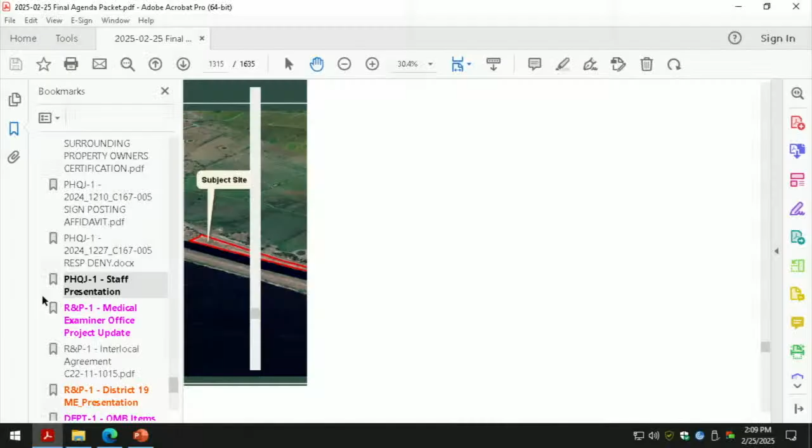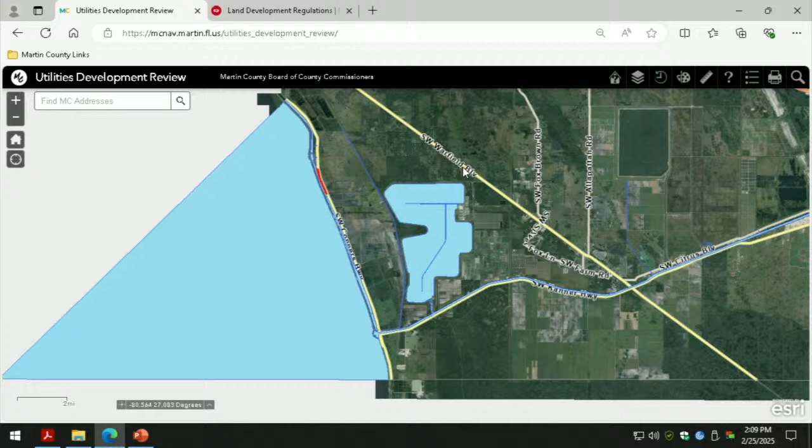for the purposes of clarity, just bring up this map. Since the property is over a mile long, it gives you a little bit better view of where it's at. So the approximate 18.2 acre site is generally located on the west side of Southwest Conners Highway, approximately 6 miles north of Southwest Kanner Highway and south of 10150 Southwest Conners Highway, which is the property to the north. This undeveloped land borders a canal on its west side and Southwest Conners Highway on its east side. There's a single-family home to the north of the property, and due south is cropland. The property is outside the Urban Services District and will use well and septic.

That's it. Oops, that's it. That's a short, sorry.

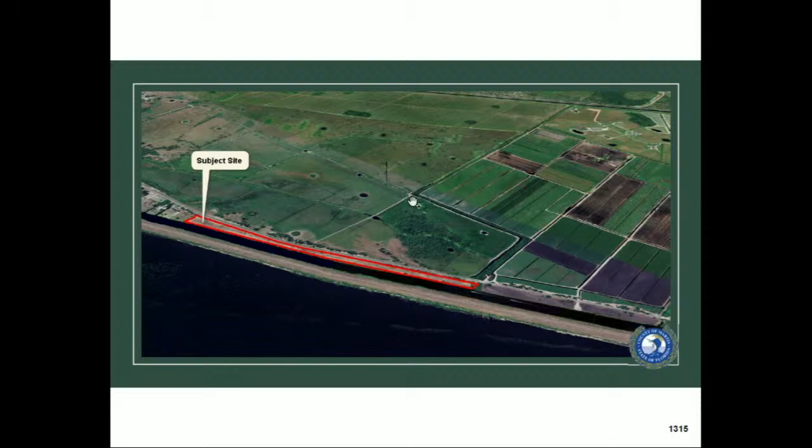The existing zoning district on the property is RE2A, Rural Estate Density District, with a rural density underlying future land use. Single-family detached dwellings are a permitted use in the RE2A zoning district. Pursuant to Policy 4.13A.5, parentheses 1, of the Martin County Comprehensive Growth Management Plan, lands with rural density shall be developed at a density of no more than 1 dwelling per 2 gross acres. All rural development shall have a maximum building height of 40 feet and maintain at least 50% of the gross land area as open space. This proposal complies with these requirements.

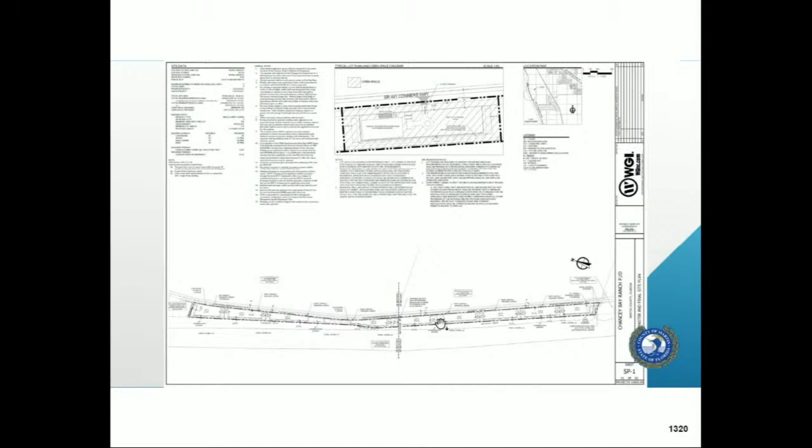This is sheet 1 of the final site plan. As I said, it's over a mile long, about 18.2 acres, so that has been split up or divided into 2-acre lots minimum, and you can see that the east and west property lines vary, so the lengths of the properties also vary.

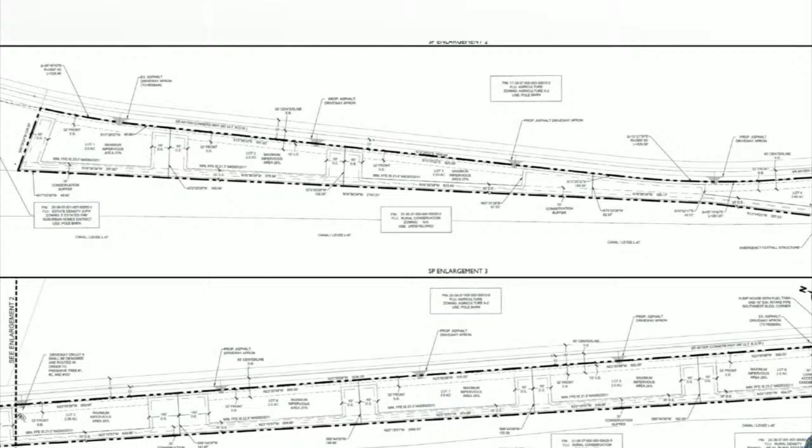In the event that the stormwater runoff becomes too high, excess water will be discharged into the canal, which is the legal positive outfall for this project, through an emergency outfall structure.

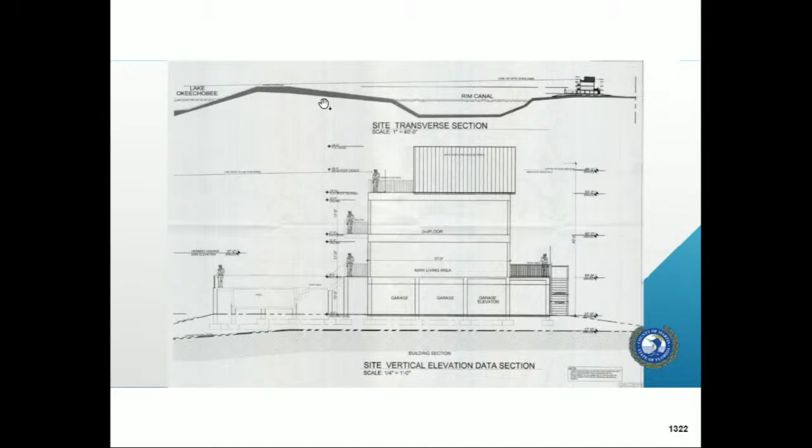Development review staff have found the CBR Investors LLC application to comply with all applicable regulations and the comprehensive growth management plan as detailed in the staff report. This application was heard before the local planning agency on February 20th, 2025, and it was voted 3-2 in favor of accepting staff's recommendation of approval.

Staff does recommend approval of this application, and we move that the board receive and file the agenda item and its attachments, including the staff report, as Exhibit 1. And we move that the board adopt the resolution approving the rezoning from RE2A Rural Estate District to Planned Unit Development, and approve the Chancey Bay Ranch PUD zoning agreement, including the master final site plan. That concludes the presentation.

Happy to answer any questions for staff. I didn't get the LPA recommendation. It was 3-2 in favor of staff's recommendation. And the dissenters, what were their reasons, do you recall?

Yes, one did not want there to be the upper level, which was shown on the conceptual plan, to be living space. They wanted it to be just a place you could sit outside, but not enclosed, such as a bedroom, no living space. I don't recall.

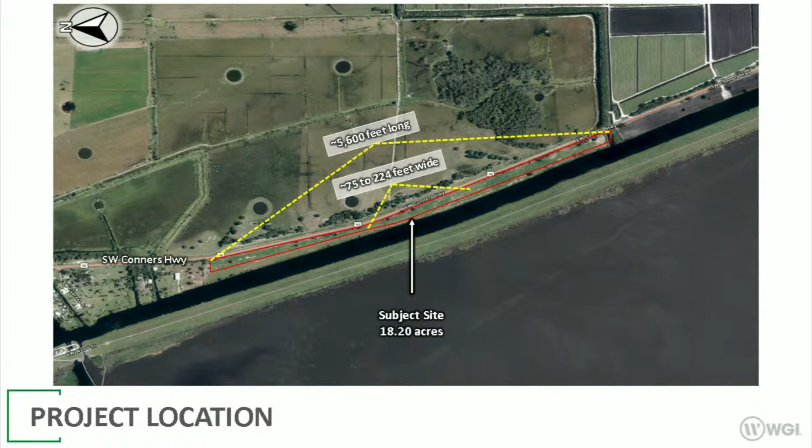Surrounding uses, also as Brian explained, are primarily agricultural, with some single-family residential to the north. This is what you would see currently if you drive along Conners Highway and look off to the west.

It's small and narrow, and it's separated by the highway from the other property that the same property owner owns. So it's too small and narrow to be effectively used as agriculture. It is already zoned with the RE2A zoning, so we're seeking to develop a compatible density subdivision.

So what are we applying for? It's a master and final site plan for 9 single-family homes, all on 2-acre lots, as well as a PUD agreement that rezones the property from RE2A to PUD, and it formalizes the development agreement and the required public benefits.

As staff noted in their presentation, there are things that we are not doing. We're not requesting a land use change. That's very important. The existing land use designation is rural density, which allows 1 unit per 2 acres, and that's what we're seeking. We're not seeking to increase the allowable density.

Number 2, we're not also increasing the density through any other means. So we're not increasing the land use, or not changing the future land use, I should say. We're also not decreasing the minimum lot size. So we're not taking 9 units and wanting to build them on half-acre lots at one end of the property. We're keeping them as intended to be 2-acre lots.

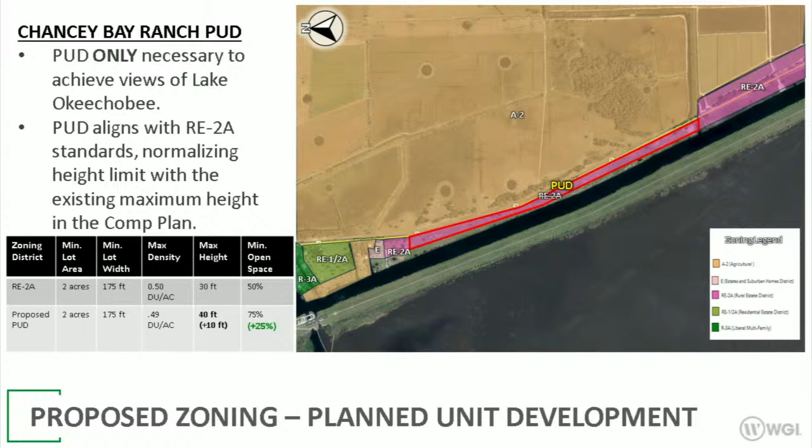So with any PUD, the applicant needs to proffer public benefits, which of course is ultimately the purview of the Board of County Commissioners. We are proffering to provide a signal preemption device for the Martin County Fire Rescue, which is a device that is put onto a signal so that all the trucks then have the equipment. When they approach the signal, it automatically turns that signal from red to green if it happens to be red, which allows for obviously faster response times across the county.

There's a second benefit to the public that is not a public benefit in the PUD agreement, but we think it is a benefit to the county and therefore the public, which is the design of the stormwater system. It's over-designed, so let me explain that. The standard county stormwater design and the South Florida Water Management District design is to hold back what's called the 25-year 3-day storm event, which is modeled. All the civil engineers know how to design stormwater to hold back that amount of water.

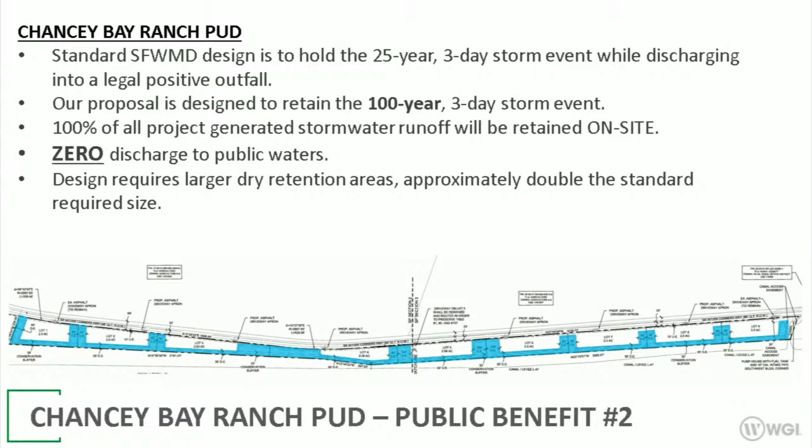So the proposed storm dry detention areas on this project is designed to retain the 100-year 3-day storm event, which is the largest storm you can model. So 100% of all the rainwater, stormwater that falls on the property will be retained on site and will not be discharged into the public water system. Our legal positive outfall is the rim canal, which is where we would normally be discharging our water. But again, we're designed to hold it back for the 100-year 3-day storm event with zero discharge into the public water system. That actually does require about twice the size of the stormwater design, or dry detention areas, I should say. So I just wanted to point that out as well.

So you saw the site plan in a black and white version on Brian's presentation. I'll get into a little more detail of it here. It's not anything fancy. The size of the property kind of lays itself out in terms of how the lots are designed. But again, it's 75% minimum open space. Each lot is 2 acres. We're not increasing density, and we're not decreasing the minimum lot size.

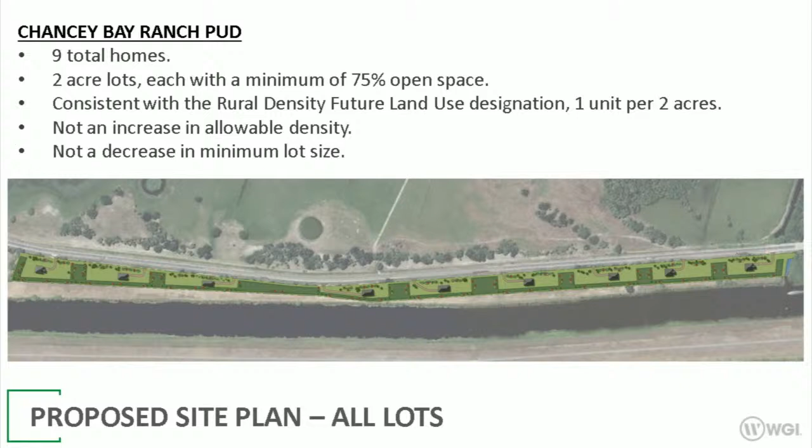Each house, when you scale it off, is approximately a 3,000 square foot footprint, just to give you an idea of what you're looking at as a representation. As Brian stated, we're not proposing specific houses, specific footprints or architecture with this.

That's handled at the building permit stage, not part of the PUD process. Each lot will have its own driveway connection to Conners Highway. The darker green areas represent the dry detention areas, where there's going to be landscaping, and additional landscaping that's not on our plan because it'll be up to each homeowner to plant trees between the front of their home and the highway.

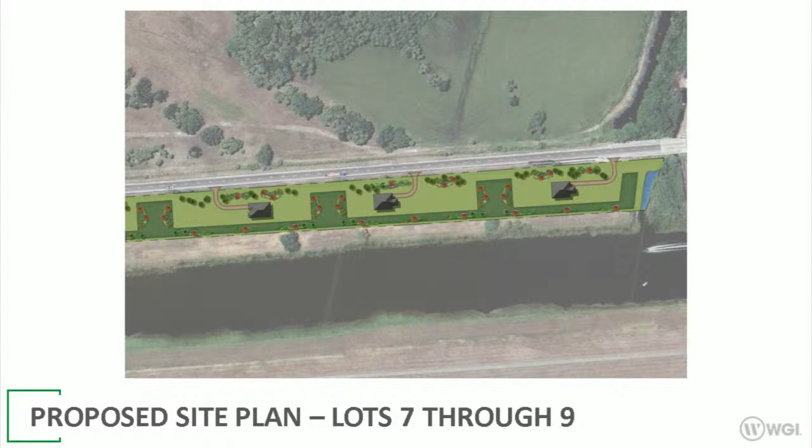There are 158 trees on site now, and we are proposing to preserve about 70% of that, 109 trees, which means we're proposing to remove 49 trees from the site. 60% of those trees that we're proposing to remove are due to poor health, insect damage, and some trees unfortunately suffered severe damage from Hurricane Milton in October.

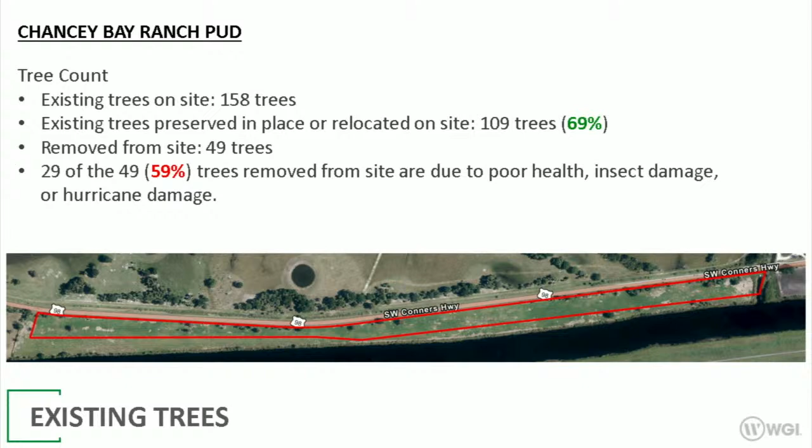But I'm pleased to report that just in the landscaping in the side and rear yards, we are proposing to add 466 new trees, which means the total tree count on the property at a minimum will be 575 trees. That's a net of 417 new trees on site when you factor in what we're removing due to poor health and other things. Again, that doesn't count the trees that homeowners will be placing in their own front yards between their house and the highway.

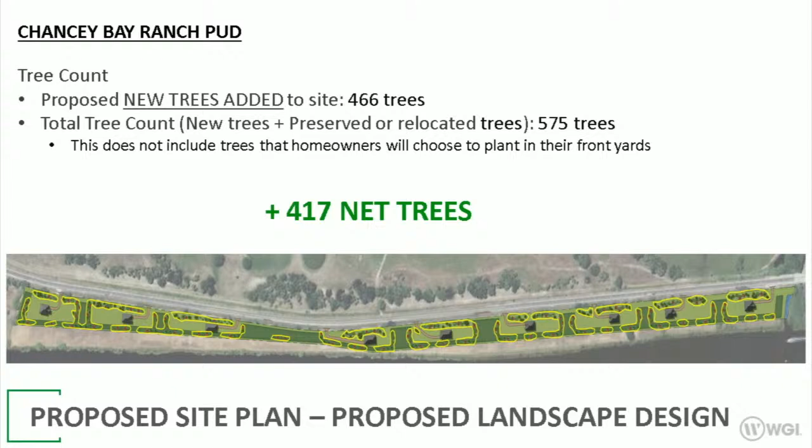I do want to point out, in terms of a gopher tortoise burrow, when the environmental assessment was first done, this project was actually filed in 2023 with the county. So in June of 2023, and again in May of 2024, a gopher tortoise burrow was found near the southern end of the property. In mid-February of this year, the site was visited again, but the burrow was found to

be collapsed, perhaps due to when the hurricane came through, but this isn't uncommon—this happens with gopher tortoise burrows all the time. In fact, it was a very isolated burrow, so it's probable that he moved on to a different location.

The one zoning regulation that we are proposing to modify with the PUD is the allowable height. The RE2A zoning district limits the height to 30 feet, and we're seeking a height of 40 feet, which is consistent with and the same height as allowed by the rural density future land use designation currently applicable to the property. Being able to get up to the 40-foot height is just enough to see over the height of the Herbert Hoover Dike.

That is, of course, directly to the west of the property. If you think back to the image I showed you, when you're driving along the highway, that's the predominant thing you see—in the background of that picture is the height of the dike. If we were limited to 30 feet, you wouldn't have enough height to be able to see over the top of the dike and then down into the lake.

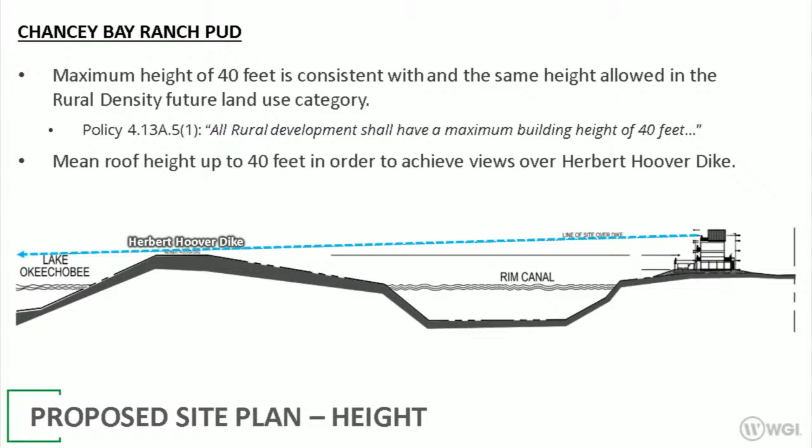Keep in mind that the surface water of the lake is approximately 20 feet lower than the top of the dike. It's not like the water is right below the dike—I mean, we hope it's not, right? So you have to be able to get up high enough to see not only over the dike, but then down into it, in order to achieve water views, which is the intent of our request for the additional height.

You just heard from staff. Obviously, they're recommending approval.

They have reviewed the project and assert that it meets all of the guidelines and standards in the comprehensive plan and the land development regulations. And I do want to just...

It's to integrate the supply chain from the producer to the consumer to raise, process, and produce the most tender and healthy local raised 100% grass-fed, grass-finished beef in a manner that protects and enhances the environment.

They are a small local operation with 100% of their cattle born, raised, and harvested here in Florida, mostly in Martin County. It's a free-range operation on the east side of the highway with over 1,000 acres. The livestock enjoy humane and clean conditions. It's grass-fed and grass-finished beef, with no grains, corn, GMO, or artificial supplements, animal products, or byproducts in their diet.

The benefits of grass-fed and grass-finished beef are less overall fat, higher levels of heart-healthy omega-3 fatty acids, and more heart disease fighting antioxidant vitamins. Environmentally, it decreases greenhouse gas emissions compared to traditional cattle farming, increases the biodiversity of the pasture ecosystem, and improves the quality of the runoff water.